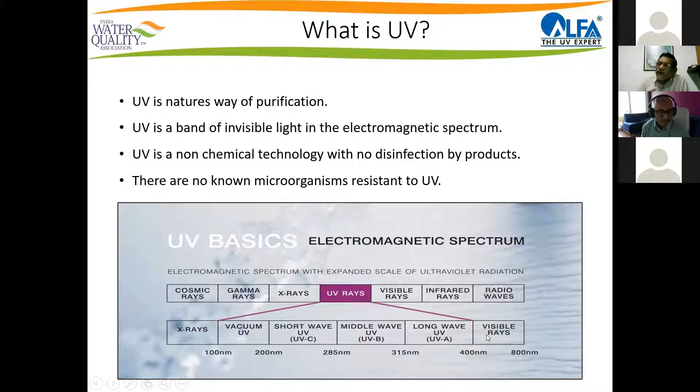In the 100 to 400 nanometer range, what is most important is primarily the germicidal UV, which we call UVC. We have UV divided into UVA, B, C, and vacuum UV. The UVC is of most interest to us, which has got the peak germicidal efficiency. So 200 to 280 nanometers is the wavelength in which we basically get the maximum disinfection efficiency.

Out of that, the 254 nanometer wavelength has got peak germicidal efficiency. So today, most of the lamps that we use in the industry are more or less monochromatic lamps which have got an output of 254 nanometers, because that has got the maximum germicidal efficiency. The kill ratio is maximum in that particular wavelength.

This is what you will see: the UVA, the UVB, the UVC, and the UVA, that's 315 to 400 - this is the black light. The suntan, you get suntan in UVB. UVC, you get the germicidal. And then you have the vacuum UV, that's the 100 to 200 nanometers.

Now what happens here is basically the energy keeps increasing as the wavelength reduces. So lower the wavelength, higher the energy. Typically when we use the 185 nanometer wavelength, it has got higher energy. We use that for applications like TOC reduction and things like that. The normal wavelength which we use for water treatment and water purification is 254 nanometers.

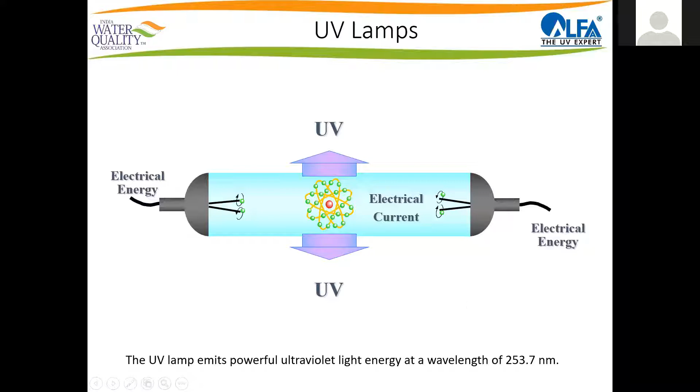Now that takes a very, very long time if you have to leave everything out in the sun for exposure to UV. So lamps have been developed which primarily give us specific monochromatic wavelengths so that UV radiation of 254 nanometers is emitted from these lamps. So various types of lamps are available, but primarily the lamp is the source of giving us the UV energy we use. So UV lamps are one of the main components.

Now, how does UV actually work? When UV light is exposed to any organism, the genetic components of the organism primarily absorb the UV light and disrupt the DNA, thus killing the microorganism. It cannot reactivate once it is properly exposed to the UV light incident on it. So that's how this primarily works.

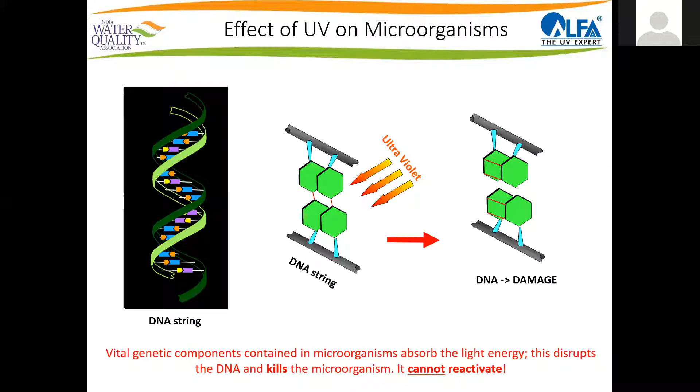Let's look at the basic UV system components. One is we have a reactor, through which the water actually passes through. It has got a quartz sleeve enclosure within the reactor. It has got the lamps which are enclosed or encapsulated within the quartz so that water doesn't come in contact with the lamps. So this is the UV reactor chamber.

Primarily, most of the reactor chambers that you will find are in stainless steel. Based on the applications, you use either 304, 316, or 316L - different kinds of material are used. Aluminum is also used in terms of reactor vessels in some cases, but world over, the most preferred material for the reactor is stainless steel.

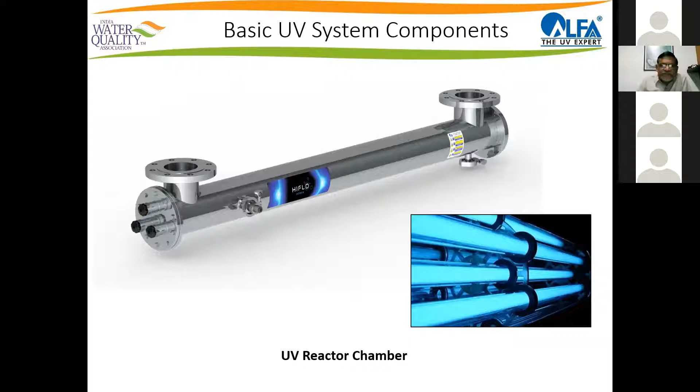So if you see the vessel, you have an inlet, you have an outlet, you have the UV lamp within that, and you have a quartz jacket around the UV lamp. We also have baffle plates that are put into some applications where we require higher doses and to ensure that the flow is a turbulent flow.

So typically the chamber, the stainless steel reactor, plays a very vital role in the design of a system. It's not just one pipe having an inlet and an outlet, but it is designed specifically to ensure that we have the maximum contact time of organism to UV.

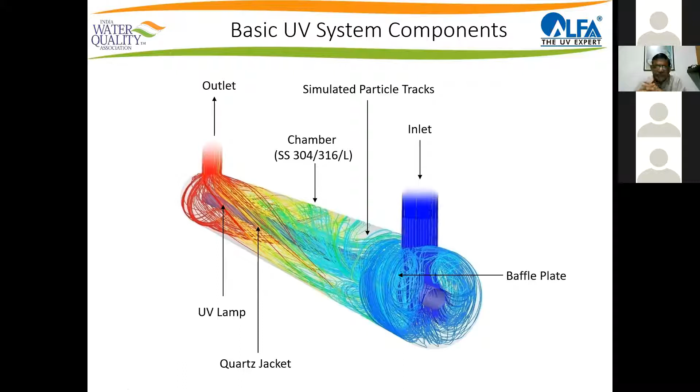Now this is another very important element of the UV system: the control panel. The control panel actually drives the UV lamp, and it also gives us various inputs based on the controls that have been put in for monitoring the system.

The most important element is to make sure that the drivers or ballasts used in the system are appropriate and properly designed for the lamps chosen. Very often, a lamp has an 800 milliamp current requirement to give maximum UV output, but the ballast gives only 200 or 300 milliamps. So the lamp will glow, but the UV output will be very low. Ballast is a very critical component in the control panel, and it has to be properly designed and configured with the lamps being used, apart from all the other control features required for proper functioning. So all that is in the control panel.

Now the other element which is very important, especially in process, is the UV monitoring system. We have monitors that sense the UV output from the lamp. These are exclusive 254 nanometer sensors used to monitor the intensity of the lamp and give alerts if the intensity comes down. It's very important to have a fail-safe device, so this helps the UV device become fail-safe. The user at any given point is aware that the system is delivering the efficiency it's supposed to. In the event of low intensity, which can happen for a variety of reasons, the monitor has the capability to trip the entire line and stop water flow through the system, so that unpurified water does not go through unintentionally. The user is always aware. So the monitor helps in doing that.

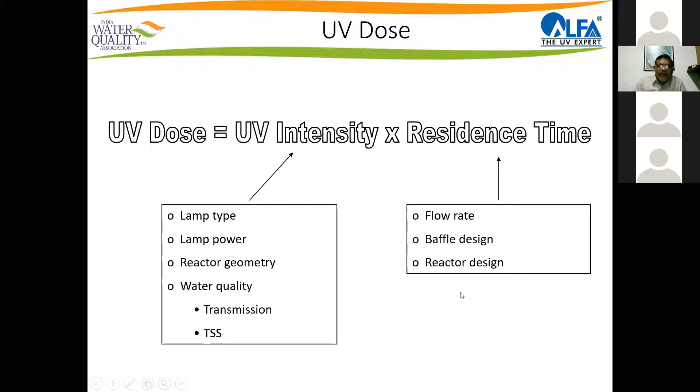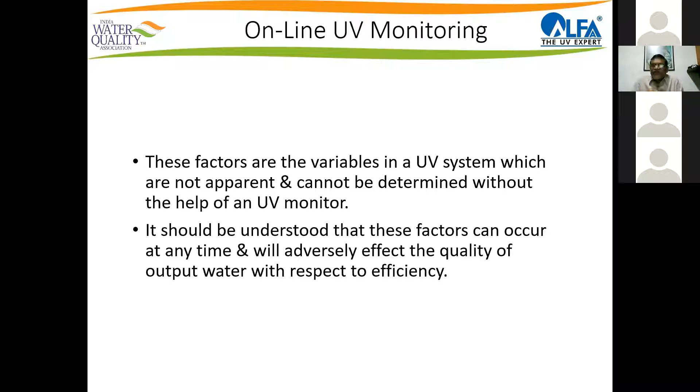These are variables in the system — they are bound to happen, they are always going to be there, and you cannot determine that without the help of a monitor. It should be understood that these factors can occur at any given point of time and will adversely affect the quality of output water with respect to efficiency. So quite often when you go down, people say it works sometimes, it doesn't work sometimes. There's no magic in this — it works when all the parameters are in control, and it doesn't work when any of these parameters are not in control. The only factor is how you define whether it is working or not. The monitor helps you do all that.

So when you want a higher disinfection efficiency, like when you say you don't want log 3 but log 4, log 5, or log 6, you have to increase the dose accordingly. Each of the organisms has a known dose relation available through the scientific community, which has done work over many years, and we know the dose relation for each kind of organism.

Now interestingly, drinking water is one of the easiest to disinfect through UV. When you're having an application of drinking water, we are talking about water which is safe for consumption — that is potable water. Water which is safe for consumption means free of pathogenic microorganisms, meaning disease-causing organisms. Those disease-causing organisms require a very low dose for disinfection through UV. In fact, most pathogenic organisms require a dose of less than 10,000 microwatt seconds per square centimeter, so that dose is very easily achievable for disinfection of drinking water.

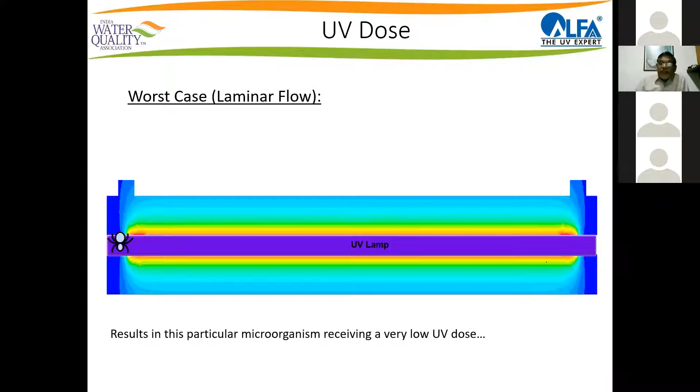Let's look at the next type of flow, which we call cross flow or short circuiting flow. This is how the flow dynamics behave in a vessel. The flow dynamics based on how the vessel is designed can give you a flow which is laminar, or a flow which is cross flow. Now let's look at a cross flow scenario, where the organism basically goes from the inlet straight to the outlet, going across the vessel.

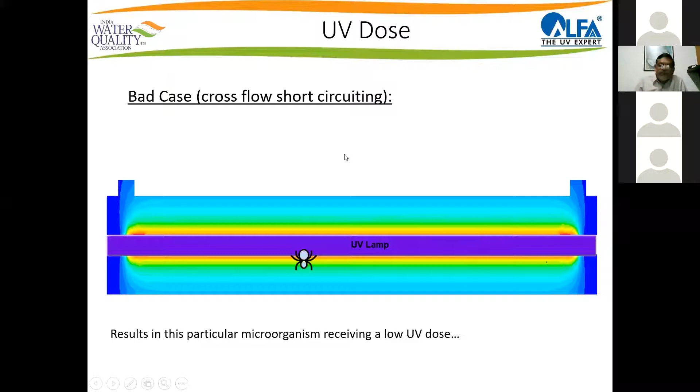This also basically doesn't give you a very good dose when the system geometry is in this particular scenario. Let's look at an ideal scenario. The ideal scenario is where there is a lot of turbulence within the vessel and the organism gets maximum exposure. This is how it will work.

So flow dynamics and the reactor geometry play a very important role in ensuring that the UV dose is maximized. Otherwise, the organisms just flow through the vessel and the disinfection efficiencies are going to be low. So for all this, we use CFDs in system design to make sure that the flow dynamics are appropriate for the dose levels required for the particular application.

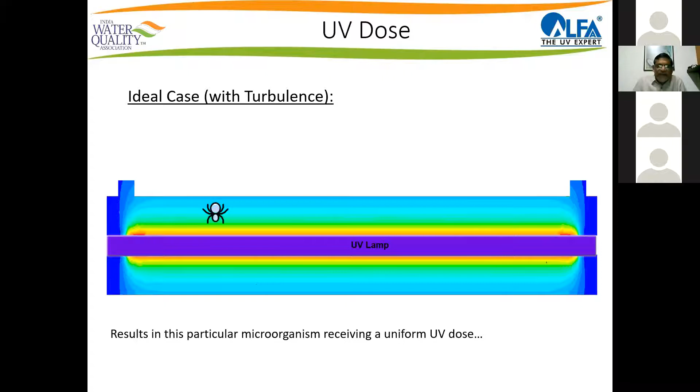Now looking at the applications. Most of us know drinking water is one of the major applications for UV. Apart from drinking water, we have wastewater disinfection and industrial process water. In process water, we talk about things like food, pharma, beverage, and paints. Different industries have got different standards in terms of quality of water. So we need to know the requirement in terms of water quality, and then ensure systems are designed for those applications.

Swimming pool disinfection, ozone destruction, TOC reduction, and advanced oxidation are all applications in UV which find good effectiveness when UV is used. Most common of them is drinking water and industrial process water. Most of us are exposed to drinking water. Process water is a very typical application where a lot of knowledge of the process and the requirements of the industry is required, to make sure you're giving them what they need.

Now in industrial process water, typically the requirement is validated every day. Let's take for example the pharmaceutical industry. There, water quality is validated on a batch-to-batch basis, meaning if a batch is made today, the water quality is tested in the lab afterward, because they collect the water during the batch. It takes at least 48 hours for the results to get released and confirmed. Until that time, the batch is in quarantine, not released, until they confirm the water quality.

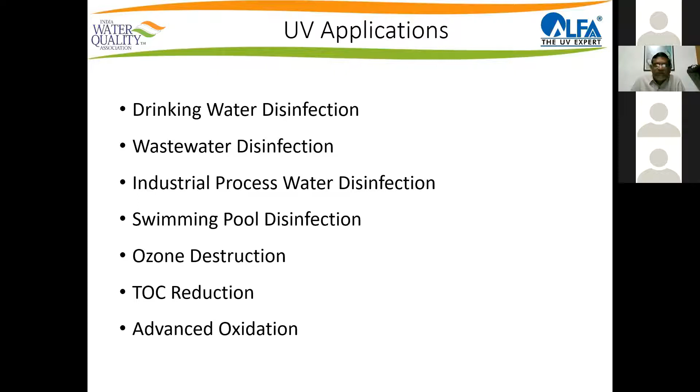Let's look at different kinds of applications. The most commonly known is the drinking water application, which is gravity-based, a centralized drinking water system, where UV is installed along with pre-filtration on each line that requires purification. Mandatorily, no UV is installed on a line without pre-treatment.

We have to have adequate pre-treatment to ensure that the suspended solids, organics, or inorganics in water which are likely to affect water quality are treated before it goes into UV. If you have a lot of suspended solids, they provide a shield for the organism to not get exposed to the UV. If it has got a lot of turbidity, the transmission of the water gets affected. If it has got iron or manganese, these are UV absorbing compounds which will again reduce the dose.

The water requires to be tested to know what kind of impurities exist. If it's surface water, it's quite easy to know. In treated municipal water, we know the kind of impurities. If it's groundwater, we require the water to be tested before we know exactly what kind of pre-treatment would be required to ensure the UV will work. So pre-treatment is a very important element for UV efficiency to take place.

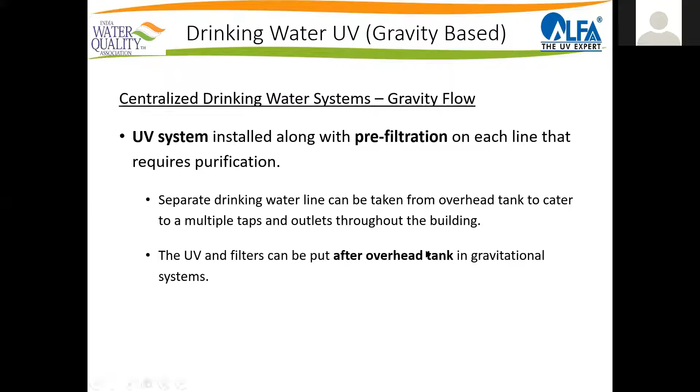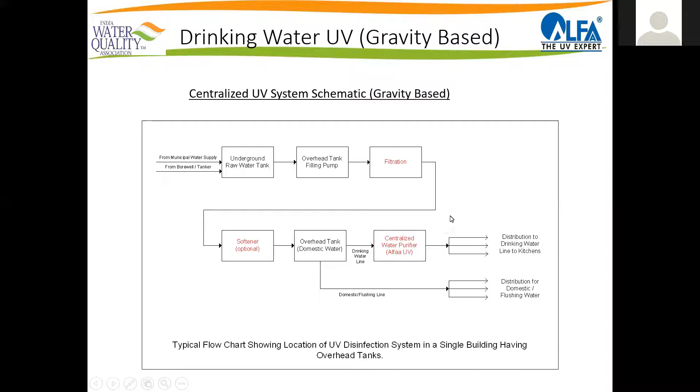So ideally we don't advocate storage of water after treatment. UV would normally be advocated after the storage line so that downstream is taken care of. Typically you have a schematic with underground raw water storage, an overhead tank filling pump, filtration, a softener based on water type, an overhead tank for domestic water, a separate drinking water line, a centralized water purification system, and then distribution to drinking water, with domestic and flushing lines kept separate. These things are discussed with clients at the project stage to decide how to put the UV system or centralized drinking water system into place.

Quite a lot of buildings are getting into hydropneumatic systems. In these, UV can be installed directly after the pump to purify all domestic water supply. The UV is sized based on the pump discharge - the maximum pump discharge is considered and UV is placed after the hydropneumatic pump. This ensures the complete water supply in the premises is disinfected and safe potable water on demand, eliminating the problem of contamination in the tank since there's no tank after the hydropneumatic system. It's an attractive option for high-end luxury apartments, hotels, and hospitals, which are now primarily getting into hydropneumatic systems.

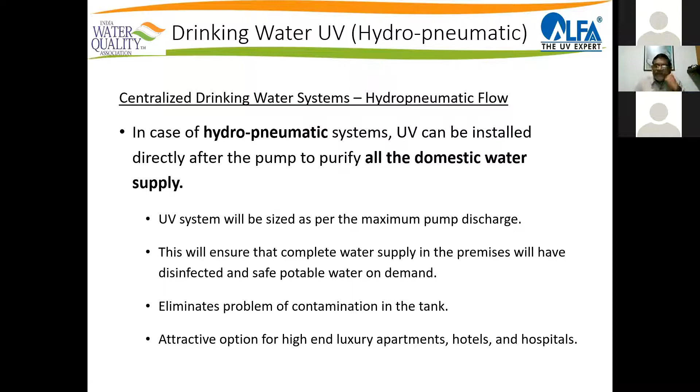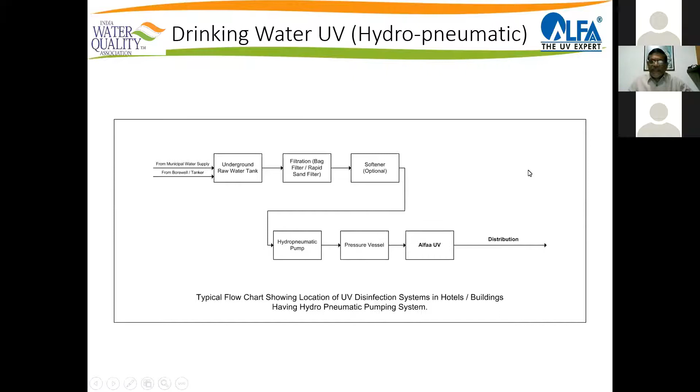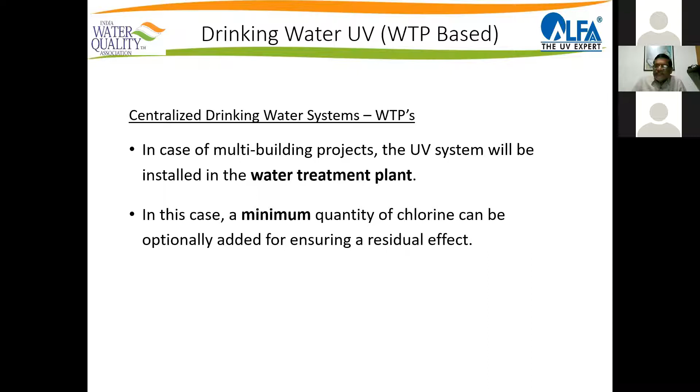In water treatment plants, basically multi-building projects, a UV system will be installed in the water treatment plant. Now, when it is centralized and at the base, before distribution can start, we normally advocate a minimum quantity of chlorine to ensure a residual effect. Because if it's a point of entry system, the distribution network in terms of tanks and piping are likely to have contaminants like biofouling. So to ensure this doesn't affect the quality of water treated at the input level, a small dose of chlorine, very small, giving the disinfection and residual effect required, is normally advocated.

In terms of application, we also sometimes advocate the use of UV before the RO. Because if the bioburden load is high on the RO membrane, the membrane life comes down. So depending on the application, we advocate UV before the membrane to extend membrane life if the input feed has a lot of bioburden. Directly putting chlorine into the RO is not advocated, so chlorine in the raw water tank would be removed through the carbon filter. But if the carbon filter is bleeding and the lines don't get sanitized at regular intervals, we advocate a UV before the RO to extend membrane life.

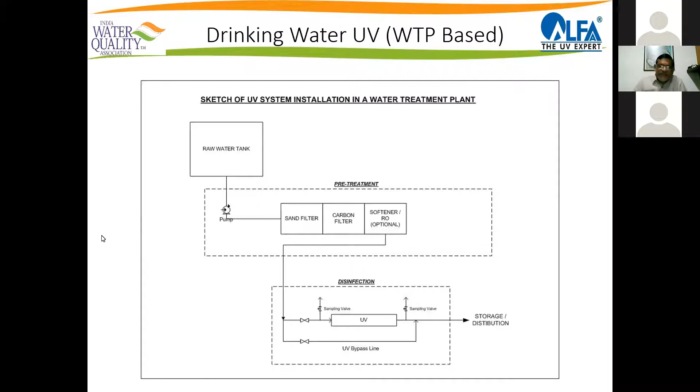After the RO, we again put in the UV, into storage or distribution. In residential RO with TDS control and auto flush, these small point-of-use units have UV placed after the RO, before the tank, along with a TDS controller. If the TDS is low, you bypass the RO, meaning water bypassing the RO comes in without treatment and without bacterial removal. In such a case, the UV will help disinfect, since there's already good pre-treatment before the RO. So if the TDS is very low and you don't want all the water going through the RO, to reduce water wastage, you have a bypass valve from the RO going to the UV and into the tank.

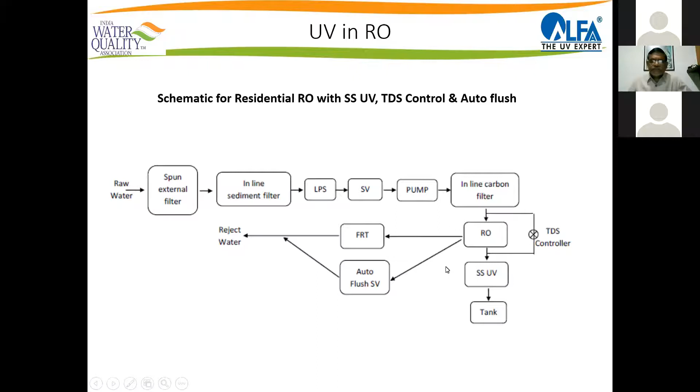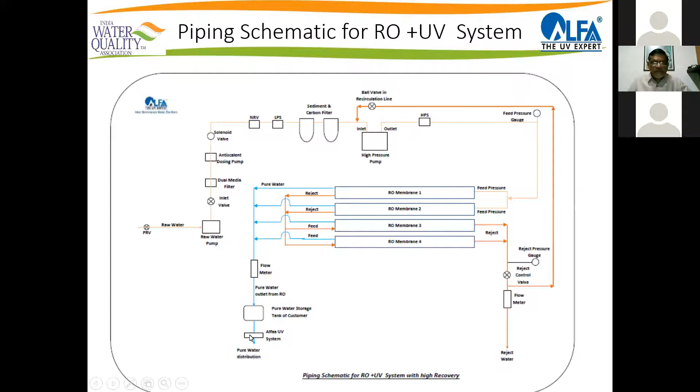These are for high recovery systems, where we have large membranes in the system with high recovery. Again we put UV in the line just before the point of distribution. So we have a dual media filter, anti-scaling dosing, sediment and carbon filter, a high pressure pump feeding all the ROs, and the reject line going back into recirculation for higher recovery. Output then comes through the customer's storage tank, and then we have the UV. So we put UV after the storage tank in this scenario.

These are point of entry systems, as I explained, for large systems, providing primary disinfection to raw water and eliminating or reducing the use of chlorination. Installed after the sand filter, carbon filter, and softener if applicable, they can also be installed after the overhead tank of each building to prevent recontamination, and eliminate the need for expensive dechlorination before RO.

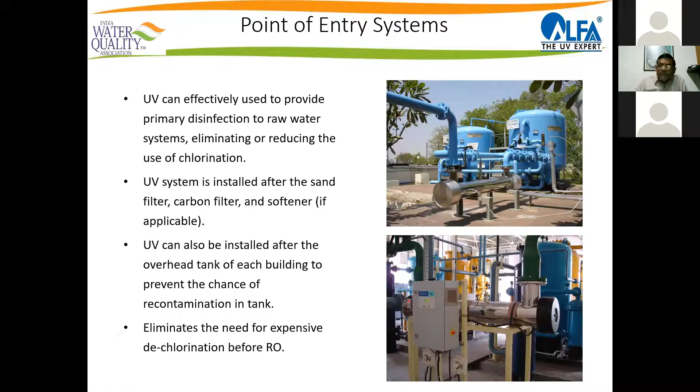Now coming to wastewater, it provides excellent disinfection. In wastewater, primarily it's the tertiary stage that we use UV. So we have the primary stage, the secondary stage, and then the tertiary stage. More often than not, wastewater has only primary and secondary stage, and then it's discharged into the sewers to meet the PCB norms. But when you want to reuse the water, which is the norm happening now, where people cannot waste water, it's reused for utility applications. So in such a case, on the tertiary line, we basically put in the UV.

So it provides excellent disinfection, and here you will notice that the treated wastewater after the tertiary stage will have more than a million colony forming units per 100 ml of sample. This is the kind of load that comes in after tertiary treatment. So you can't use this directly into utilities. It requires proper disinfection, and here UV is a very good application.

So in wastewater, there's a lot of application of UV that can be done. Tertiary treated water may appear clean, meaning the water goes through the tertiary line because it goes through filtration. The water may be clean, but the bacterial load in that water is very, very high. So disease-causing microorganisms must be disinfected before utility.

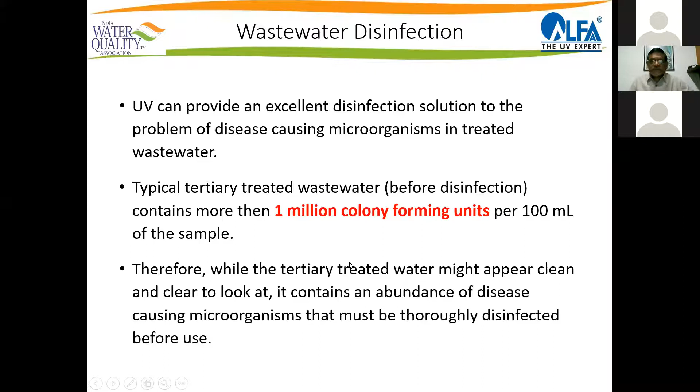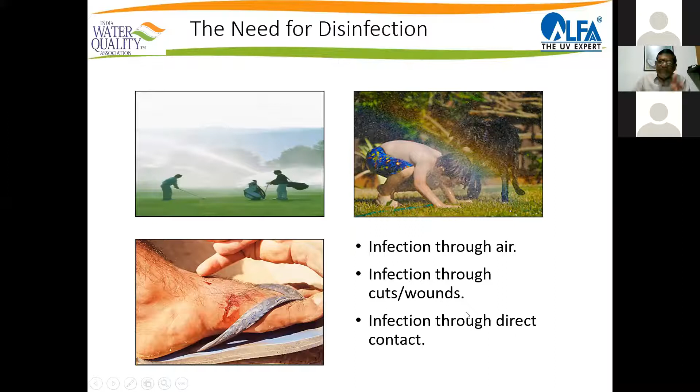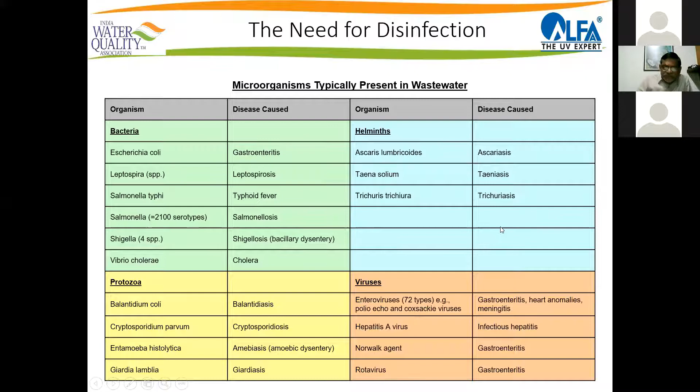These are microorganisms that are typically present in wastewater. So we have viruses as well as bacteria, we have protozoa. All these are present in wastewater, and each of these organisms can cause diseases. So UV is the only technology which can provide the high level of disinfection required in a simple and cost-effective manner for wastewater applications.

So if you see the typical wastewater recycling flow chart, we have pre-treated sewage or sullage coming in. It goes through a sand filter, then a carbon filter, then UV, and then into secondary use - gardening, boiler feed, cooling tower feed, or toilet flushing. Based on what kind of utility applications are there, you typically find a wastewater treatment plant having a primary, secondary, and tertiary line treatment. Having the UV after the tertiary line, after the sand filter and carbon filter, is a good option for effective recycling of wastewater.

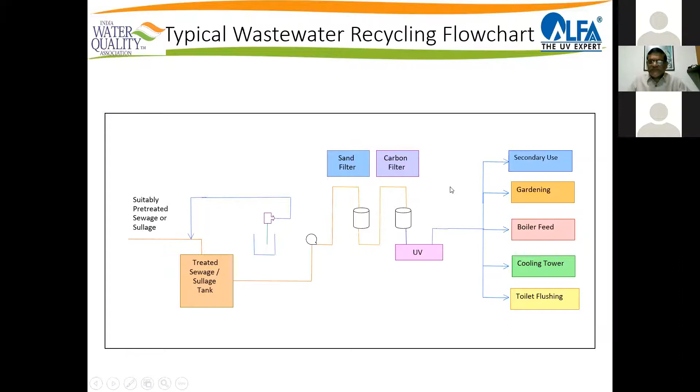Reasons to choose UV over chlorine in wastewater: chlorine residual limits. For reuse, dechlorination might become essential - all applications may not allow chlorine to be present. In such a case, UV becomes very useful. UV is a disinfection process which requires no chemicals and generates no residue. So it's very useful to ensure there are no byproducts available in the water.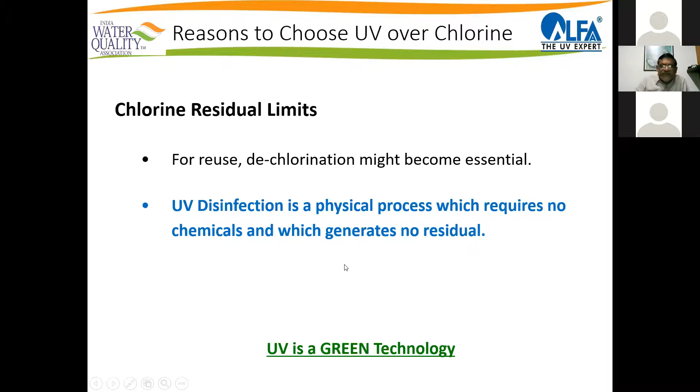It's a green technology. Trihalomethanes are common byproducts formed when chlorine is used, and trihalomethanes are known to be cancer causing. So in quite a few places chlorine is actually banned, in European countries where they don't allow chlorine to be used because of this scenario. UV is environmentally friendly, producing no trihalomethanes or carcinogens.

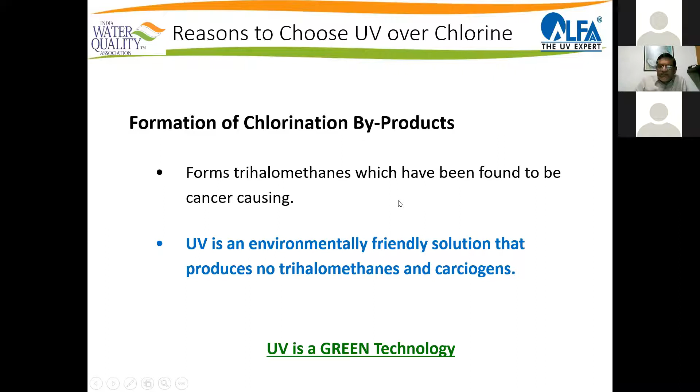Land requirements where chlorine is used are very large. Large contact tanks are required for chlorination to provide adequate residence time, whereas UV is delivered instantaneously, and there is no need for large tanks, leading to significant space and therefore cost saving.

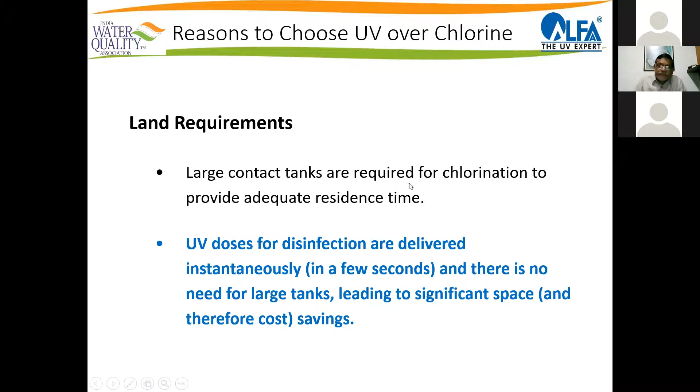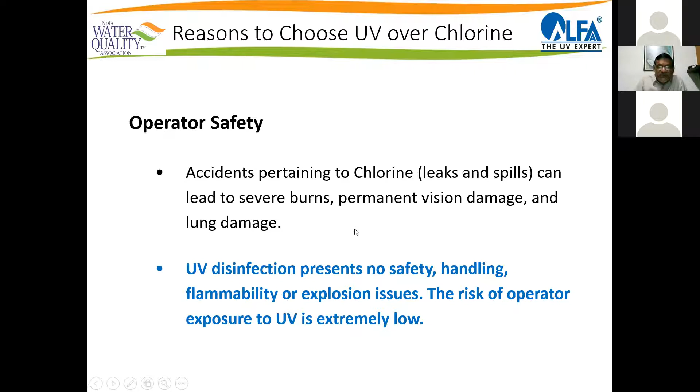Operator safety is again another issue. Accidents pertaining to chlorine leaks and spills can lead to severe burns, permanent vision damage, and lung damage. UV disinfection presents no safety, handling, flammability, or explosion issues. The risk of operator exposure to UV is extremely low.

Cost effectiveness: in most plants, sodium hypochlorite is used, which is expensive. UV, on the other hand, has a much lower operating cost, and for most users the payback period is between 1 and 2 years. After that, it's only the running cost, which is very, very cost effective.

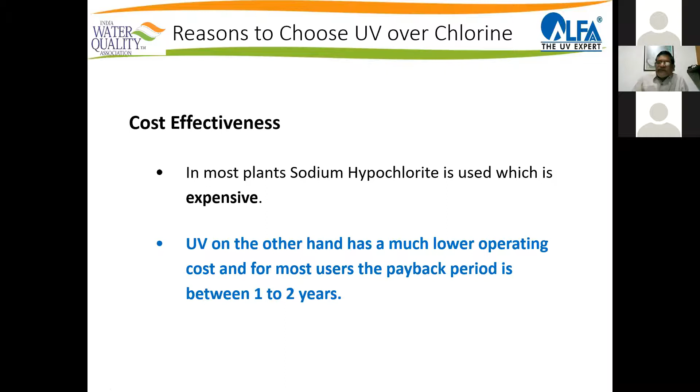Online checking and validation is another benefit you have. Effectiveness of chlorine is difficult to monitor, requiring periodic manual testing of free chlorine residues in water. UV, on the other hand, can provide online monitoring and convenient interfacing with most BMS systems. In building management systems, we can interface and automatically trip lines, use whatever we want, etc.

These are some special applications that we have. TOC is another application where the limits of TOC should be very, very low, especially in the pharmaceutical industry. I remember when we used to work in the industry, norms at that given time used to say it's okay to have milligrams per liter. Now they're talking about PPT.

They're not talking about ppm anymore. They're talking about PPT, parts per trillion. So to get that high level of reduction, the organic carbon load has to be reduced in the input water. UV is effective there.

There we use the 185 nanometer wavelength, not the 254 nanometer. It's a shorter wavelength that is used, so it's got higher energy. So the organic gets broken down into carbon dioxide and water, and therefore the total organic load comes down in the water stream.

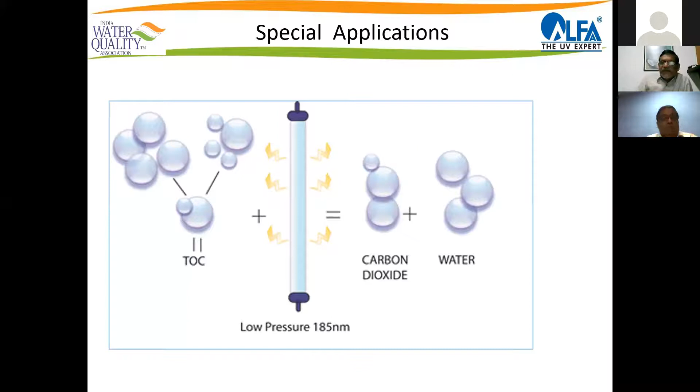Ozone destruction is another application because basically ozone is not allowed down into process streams. So we use UV to see that it is destroyed before it goes into the process. Here again, we require very high doses. It requires a dose of greater than 120,000 microwatt seconds per square centimeter. Multiple units of conventional systems would be required even for moderate flow rates.

Typical loops where ozone destruction is required are at elevated temperatures where standard low pressure lamps are not suitable. So here we cannot use low pressure lamps. We have special lamps, we use amalgam lamps where temperature doesn't play a vital role because these are all maintained at hot water loops in the process.

We also have cold water loops which require disinfection. So for ozone destruction and cold water loops, primarily we have UV which is being applied.

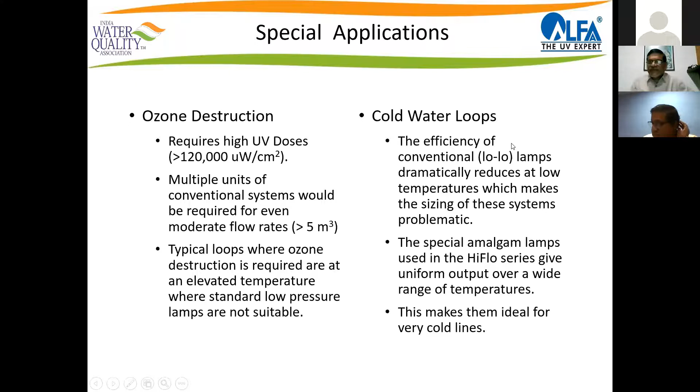In ultra pure water purification systems, UV is used for effective reduction of organics, commonly referred to as TOC. TOC reduction typically takes place when 185 nanometer wavelength lamps are used to emit wavelengths in the 185 and 254 nanometer spectrum. Generated by a different quartz envelope material, the 185 nanometer wavelength for TOC reduction is shorter and consequently more powerful than a 254 nanometer wavelength.

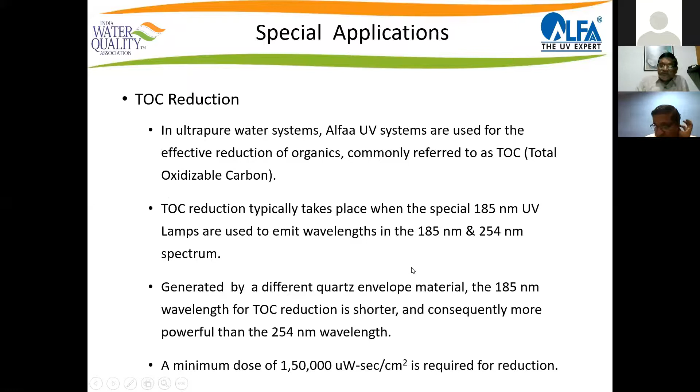A minimum dose of 150,000 microwatt seconds per square centimeter is required for reduction. Since carbon dioxide is a natural byproduct of the process, a certain drop in the water resistivity will occur after the UV. This is caused by an ionizing charge, some organic elements holding after receiving UV energy. Using a final DI step will restore the water's conductivity and will further reduce the level of the remaining organic elements. So this is how we basically manage to see that the TOC is controlled.

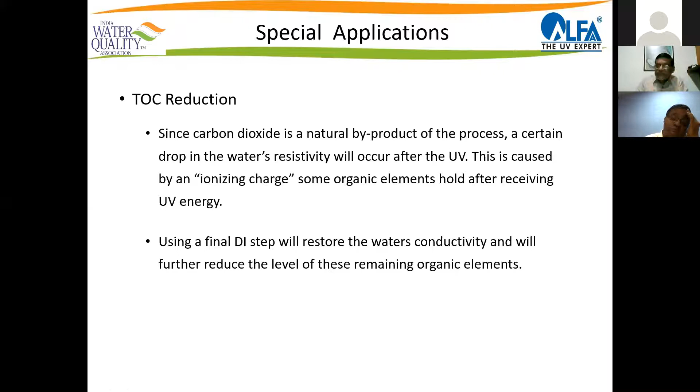Sizing and selecting a unit, and sizing a unit. Do we have time for this, Chandu, or do we take this in another session? I suggest that. Hello, yeah, can you hear me? I can hear you, yeah.

What I suggest is that I think this is a very good background of UV and its applications that you have captured. This sizing part, with maybe some case studies or projects that have been done in the past, maybe two or three, so that people have a better understanding, that's what I see. No, because this is ultimately the most important thing. One is understanding fundamentals, second is understanding the applications, the third thing is what to use where and how to size it.

Exactly. So probably what I suggest, my point of view is that this is something that's not going to happen in five minutes. No. I also do not want that, because you will probably agree with me that the discussion that happened, or the presentation you made up to this, is a completely good background of UV, its application in the different, either in the wastewater or water, drinking water and other segments.

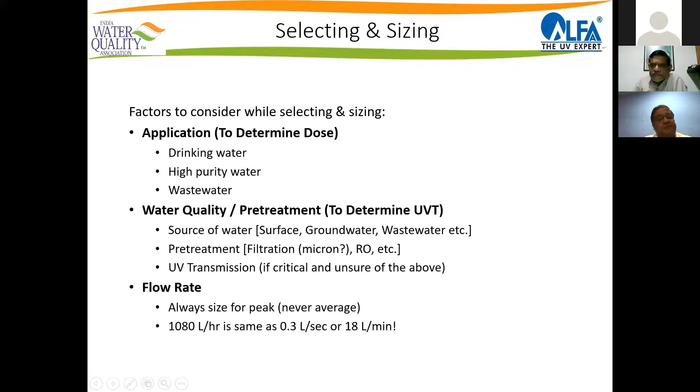So let me put it in. Thank you, Raju, for capturing this in such a lucid manner. I think we had a very good coverage of the fundamentals of UVs, and how different kinds of microorganisms are handled. Many people only think about bacteria and virus, but they should also see that molds and other organisms are also taken care of, and people have understood a little bit about what different UVs, and especially TOC, is something UV also plays a big role in.